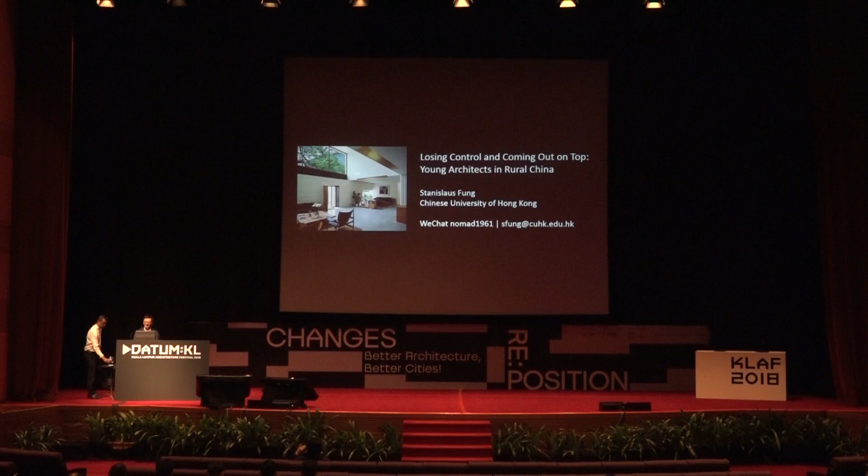The talk that I'm presenting to you is in 4 parts. And if we run out of time, I will have to rush the last part or omit it altogether. But let's hope the going will be good. Basically, I will give something of a quick overview of Chinese architects in the last 30 years, mainly because in the English language, a simple, useful account is not available.

And then in the second part, I'm talking specifically about gardens in Suzhou, especially about how to restore the visual experience of these gardens in a way that is useful for designers. And in the last 2 parts of the presentation, I'm speaking about small boutique hotels in 2 rural locations in China. One in southwest China, in Yunnan province, a place called Dali, where tourism has been doubling every 3 to 4 years. And also outside Shanghai in Moganshan, which is the only mountain area outside Shanghai accessible by car within 2 hours. So that's generally the outlook of the talk today.

I'm giving you on the screen some account of what the people who are currently practicing and aged 35 or thereabouts, people born in the 1980s, received from their seniors in the profession. The seniors, I mean people born in 1950s, 1960s, 1970s. Chinese education for architects since the 1980s, after the Cultural Revolution, was very much a local variant of the Beaux-Arts tradition that was imported by the University of Pennsylvania in the earlier part of the 20th century. They were interested in formal composition, basically.

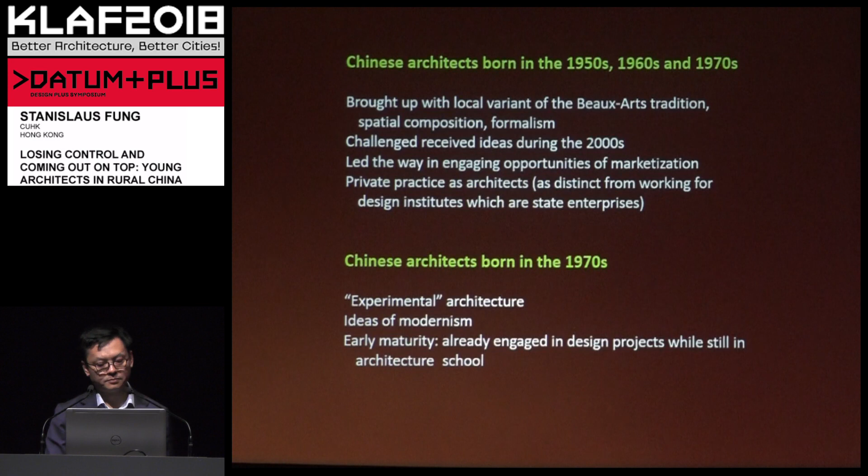People born in the 1970s had a lot of opportunity to practice. They were usually already engaged in design projects while they were still students. And so they were capable of an early maturity that probably wouldn't be seen in Australia or in Europe, where opportunities to practice wouldn't go to young people so quickly. For the people that I'm interested in today, those born in 1980s, they grew up with a discussion of tectonics. This was basically a reaction against poor quality construction. They weren't able to do German or Swiss quality construction, but people were talking about it as an aspiration.

The students born 1980s were in school maybe 13 years ago, and at the time people were discussing architectural space, spatial syntax, something like that. This generation of students was the first generation to grow up with the internet. The internet came to China around 1999-2000, around the time of the Sydney Olympics. This allowed them to gain access to a huge range of imagery that would otherwise not have been available to them in printed media. And for a while, the students outran the teachers and the publications sanctioned by the state.

They also had joint studios with foreign schools of architecture. In the last 18 years, more and more schools of architecture from overseas had joint studios with places like Beijing and Shanghai. This internationalization outran a lot of schools in Australia. Opportunities to study overseas became more generally available to people in this group born 1980s. Their family circumstances were better than those before them, and there was more cash to support them to go overseas. So this was similar to what happened in Hong Kong maybe during the 1970s.

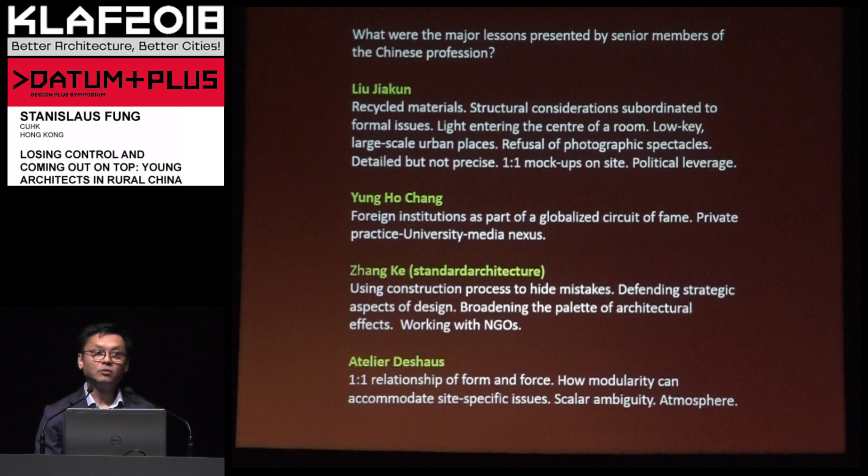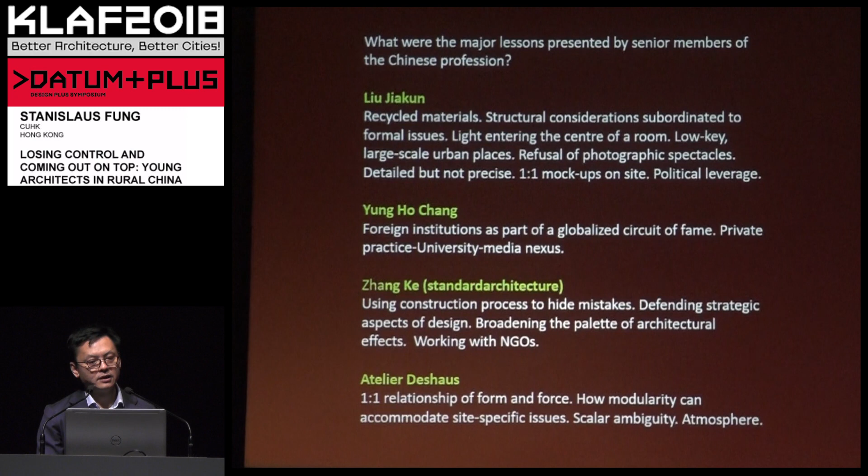So let me summarize very quickly for you what were the major design lessons presented by senior members of the Chinese profession. By this I mean senior members who were not working for the state enterprises called design institutes. Liu Jiakun from southwestern China in the province of Sichuan is very well known nowadays for discussing recycled materials. You remember some while ago there was a massive earthquake in southwestern China, so there was a lot of debris. And he developed interesting approaches to recycled materials in response to that.

He was somebody who did work that didn't pay attention to whether it would look good in photographic spectacles. Sometimes he would do details that, when you photograph them, wouldn't come off as highly detailed. He was not interested in doing work that competed with KPF in terms of the precision of detailing. He thought that was too technical. And there was a sense of detail in his work that didn't depend on geometric precision. Because he worked with a lot of unskilled laborers on sites, he did one-to-one mock-ups on site to control the quality and to look forward to what could be done with the skills available.

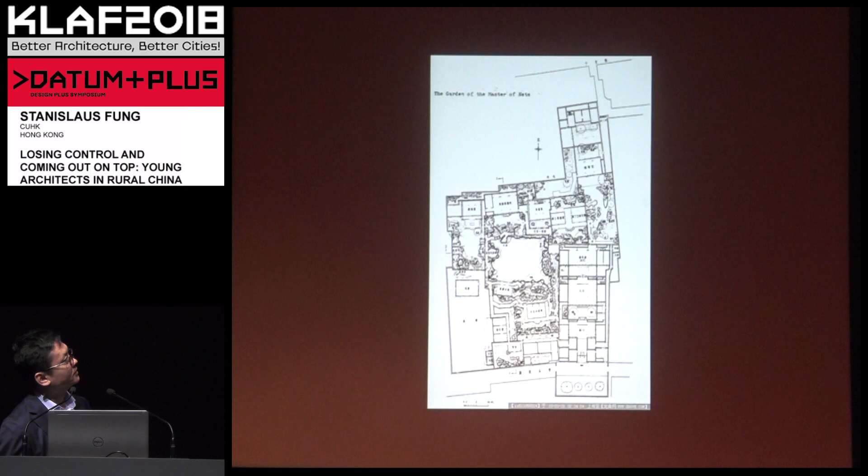And instead of allowing the pond to take the full width of the site, the division of the site actually goes north-south and makes two cuts. One cut here, one cut here. And so the pond, in terms of the width of the pond, is much smaller than otherwise we could have. So the whole issue then becomes how to make it not appear so small.

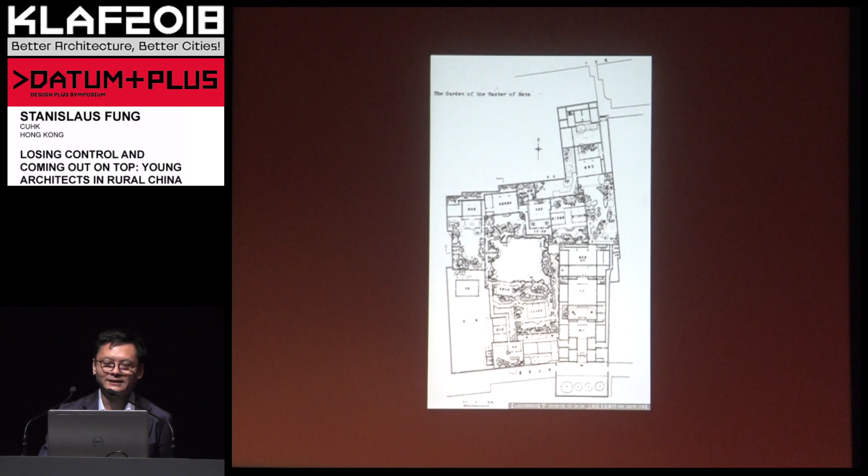On the southeastern side of the garden, there is a passageway leading to the pond. And as you walk closer to it, the pond seems to increase in depth. So you are getting closer to the pavilion on the opposite side, but as you move closer, it seems to be moving further away.

North of the pond, there is a room, and there are two doorways. The smaller doorway leads to the bigger space. The bigger doorway on the left leads to the smaller courtyard. In other words, the sizing of the wall opening confuses you in terms of your expectations. On the right-hand side, as you move towards the wall opening, for about 3 meters, there would be no reason for you to revise your estimation of how large that space beyond would be until you reach the opening and you realize that it's much bigger than you thought.

When we look from the north side of the pond towards the south side, a flower bed is strategically positioned to hide all the water of the pond. And as you expect from the previous discussion of the larger garden, whenever a ground surface or a water surface is hidden, there is a spatial collapse of distance. And so we experience the pavilion on the opposite side of the pond much closer to us than otherwise would be.

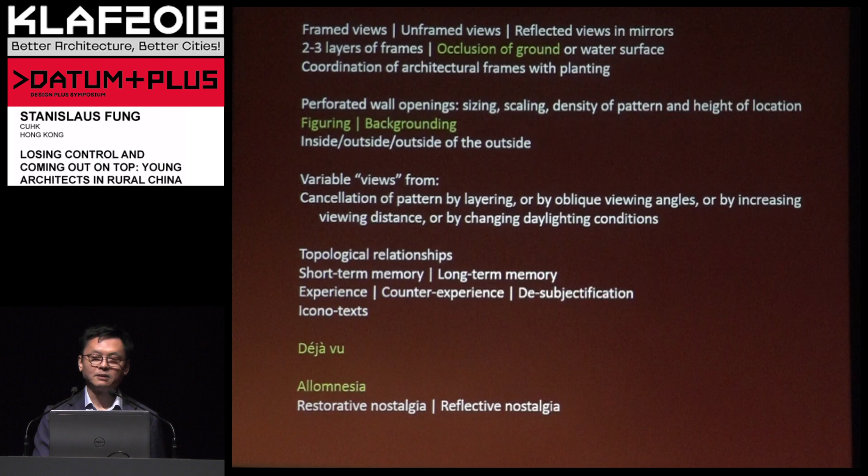So the third part, this is the hotel in Dali. Dali is not a famous city. It's in southwest China, not rich. In 1984 or 85, nobody knew about it as a tourist destination. That year, Lonely Planet published it and said it was an authentic part of China. Suddenly, 10,000 foreigners descended with foreign currencies, and they were totally unprepared.

After a while, the mainland Chinese themselves were rich enough to do internal tourism. They decided to go to Dali to look at foreigners because there were not so many foreigners in their own cities. The foreigners were not happy about that. So eventually, the local tourism became more directed towards internal tourism. And so nowadays, with the pollution in the bigger cities, people are very happy to leave Beijing and Shanghai and take their family for a week to Dali. You could rent a room for 300 yuan a night, and in this hotel that we want to do, the average floor area is 24 square meters per room, and we want to charge $200 and not make you feel bad.

At the street level, in the old city, there's a cafe from the hotel overlooking the street, and the level of the cafe is about 1 meter off the level of the street. As a result, walking by, you won't be able to see the floor surface of the cafe. And as you know from the Chinese gardens just now, whenever the floor surface is hidden, a space collapses. And so you can see this a little bit already in this view, because the floor surface there is hidden, and the distance of the wall of the room at the back of the courtyard is a bit ambiguous with everything else. There is actually a sill height here at the back of the cafe, and that assures that the ground surface of the courtyard behind would be hidden.

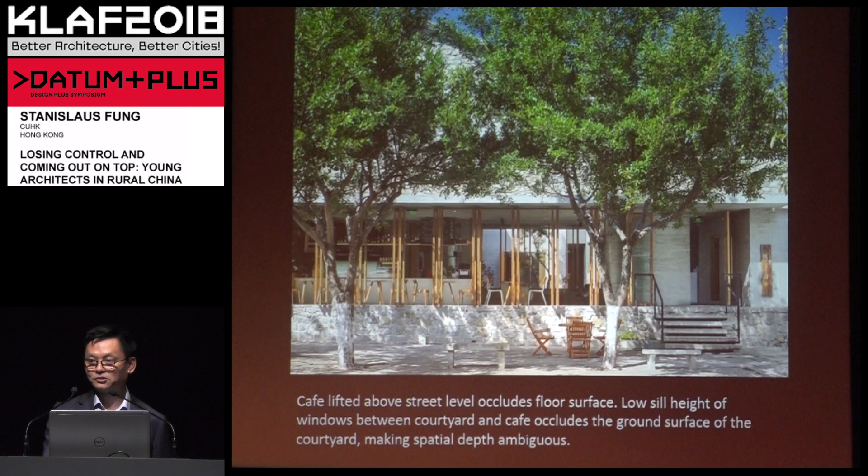At the scale of the rooms, though, 24 square meters is not large, and allows you, say, 13, 14 rooms on a rather limited plot, and they insist on sloped roofs in this part of the town for conservation issues. So you'll see that in a minute. The entry is on the right-hand side, and it's not a grand entry. It's off-axis twice, and is leading you in.

And this is the view of the courtyard looking towards the street, where we mentioned just now there's a window sill height here. So looking this way, because you're looking down on the street surface, you necessarily see the street surface, and so the distances are manipulated and different from what you had from the first view. So we're entering the courtyard in the middle, and there is a certain compression of height, and then you are in the courtyard. The courtyard is rather long, and is divided into three parts, simply because you have a tea room with glass on three sides in the middle part.

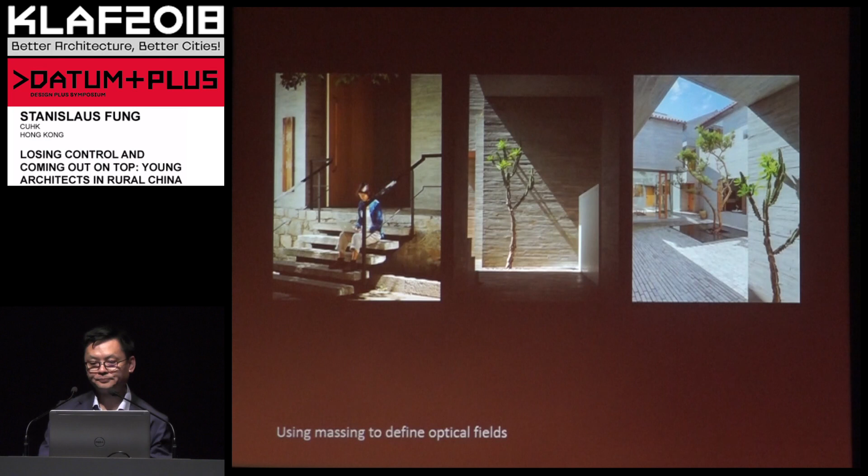So this is the main courtyard north of the cafe just now, and the tea room is on the left-hand side. In the notes, I'm saying the setback relationship of the walls created different aspects in the common courtyard area. And the scalar ambiguity is implied by the position and sizing of windows and doorways, and also by hiding the position of doors from certain vantage points.

You know there's upstairs, but in this view, you don't know quite how to get there. In other words, there's a disjunction between visual and tactile fields. In Chinese gardens, we often see pavilions in the distance where we don't see a path leading up to it, and this is exactly what is happening here.

You notice as well the thinness of the eaves overhang here. This is not a traditional way to do a roof with tiles. They have simply omitted one of those elements to make it thinner. It looks traditional, but actually it's not a traditional construction.

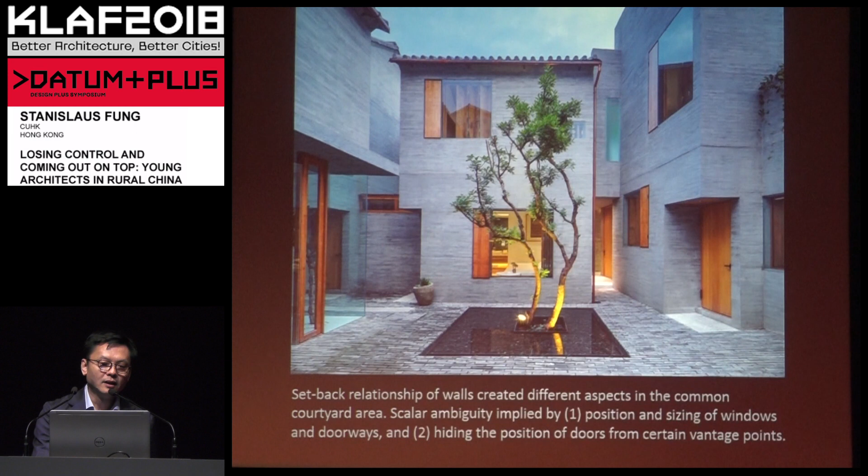The next view I'm offering you is about the suppression of the wall thickness. This is a way to avoid a scaled sense of the space, because wall thicknesses can be telling you a story about that. The window frames also have to be detailed to work with that. So whenever you want an effect, you probably are doing 3 or 4 things at the same time.

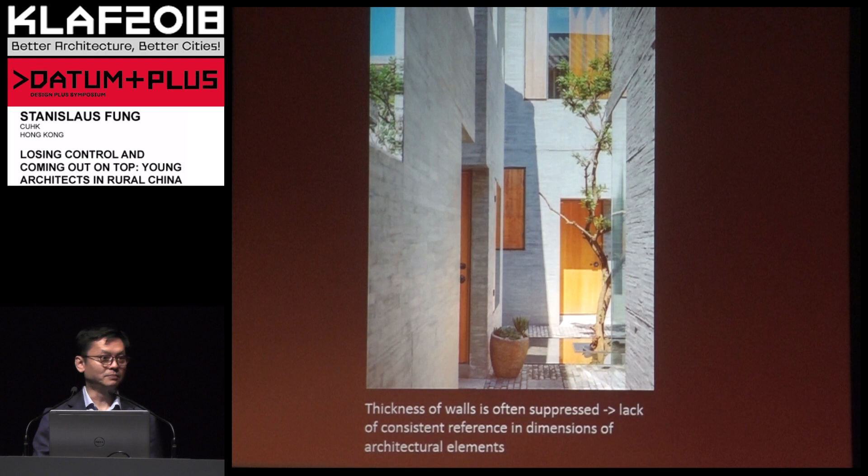You notice that there's no brickwork here. It's off-form concrete with strange thin strips of wood for the formwork, and so there's a scaling trick being used as well. So for every effect, 3 or 4 aspects of detailing are called upon to sustain it. We talk about it this way because we don't prefer to talk about things as single cause-effect relationships. I did this because of this. That's too simplistic and people work it out far too quickly.

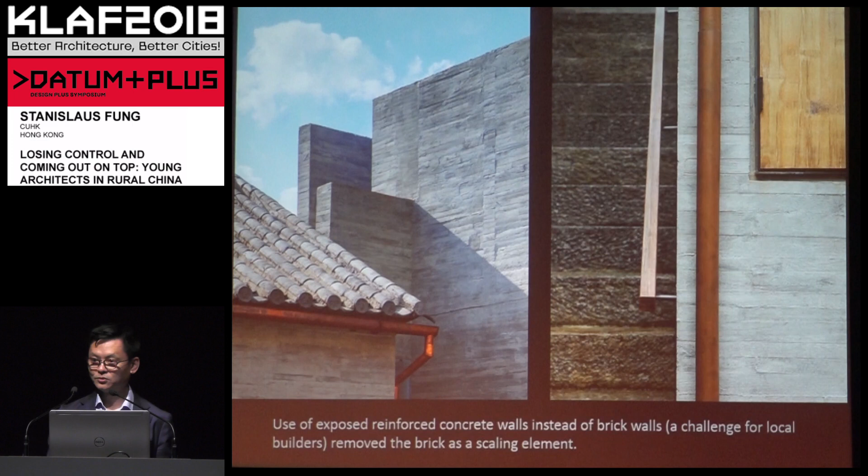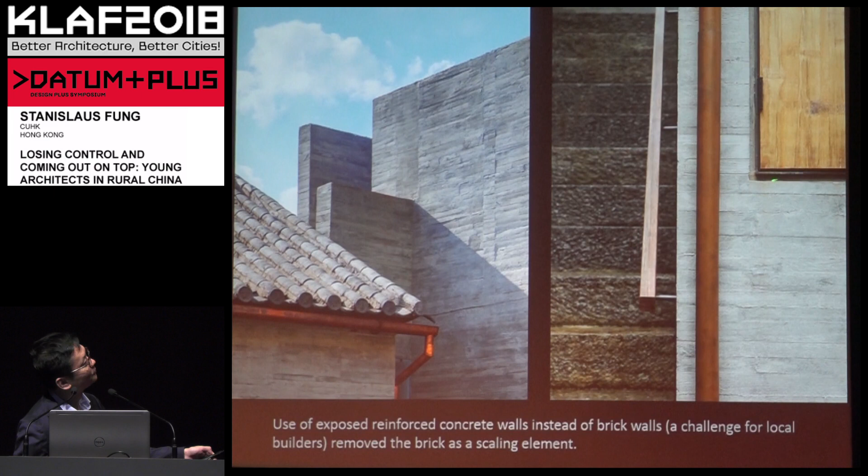So this is a close-up showing the off-form concrete, which is not so easy to do in rural China because you don't get the experienced work people to do it. And in this case, they had to bring people from Kunming, about 6 hours by train away, to come and do it. You notice the thicknesses here? They are coping and hinting at precision, but in fact not capable of delivering it.

So we have been developing, without telling you, a distinction between hi-fi vocabulary and lo-fi vocabulary. Hi-fi is high fidelity, lo-fi is low fidelity. And in rural China, we are mostly dealing with lo-fi architecture. And this distinction has been elaborated most recently by Jeremy Till, a professor in London. So far, our lo-fi vocabulary for thinking about boutique hotels is listed here for you. You're very welcome to take a photograph of the image instead of taking notes yourself.

But you see that this list of vocabulary is not what you normally have for discussing hotel design or architectural design. And they are tailor-made to point to the specificity of the images that we have been looking for. It's not that we use theoretical terms to sound intelligent, but rather we use the unusual vocabulary to call attention to the unusual effects that we are seeing in those images.

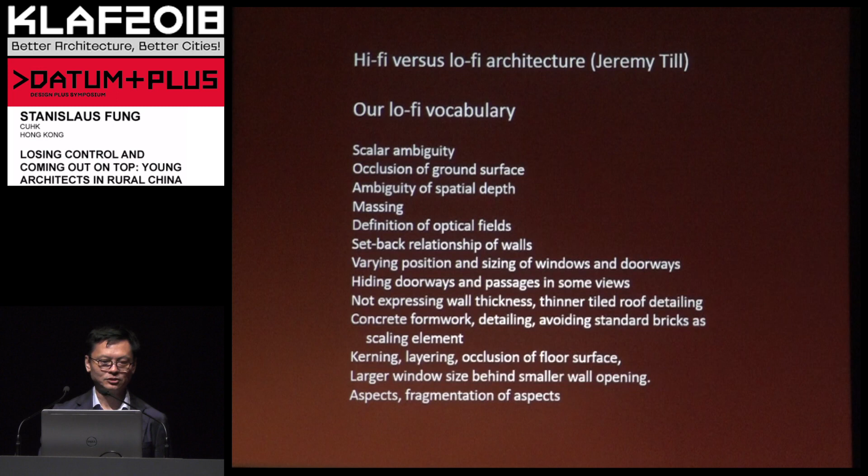Last part is about the Lost Villa. And this is a village where Chiang Kai-shek used to have a summer resort. So it's outside of Shanghai, 2 hours by drive. So in the village buildings, there are all sorts of ownership rights, and you really have to respond to them. For example, there is a vegetable patch here, and it's because the old lady who owned that plot didn't want to give up her business of growing vegetables. So you have to fit your hotel around what she wanted to do.

There are other neighbors who have other ideas as well that you have to work with. And these requirements or expectations might not be announced to you when you do your designing. When you have started building the project, they start announcing their objections and so on. So you are developing and changing, and eventually, if you don't do it properly, it will look terrible. There are no survey drawings in villages, so where the electricity cables are is a guesswork thing. You might find the cables 1 meter closer than where you thought they were, and you have to move a wall or something like that.

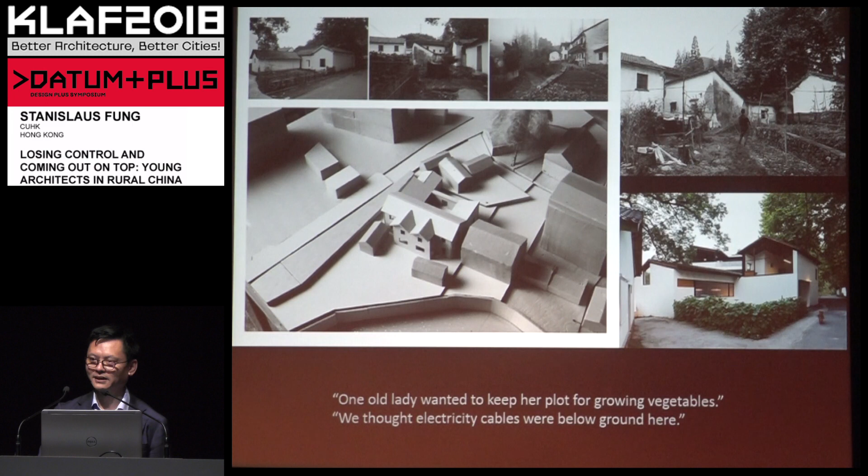So eventually, we developed an idea that there were constraints, and there were ad hoc responses to the constraints, and this led to 4 kinds of considerations, which I listed for you in English on the lower right of this image. So the design thinking is very specific, and we're not narrating it as if it was a generic design process.

Because we're interested that each site has its own contingencies, we started listing them by what the architect thought was predictable or unpredictable. Natural Build is a firm with 3 partners, and Shui Yanfei, the design partner, is trained in Tongji University and Princeton University. A young person who could read Dalibor Vesely, and actually was accompanying Dalibor Vesely to Suzhou about 10 years ago. So this is a guy who could actually read something and write something and do the jobs. So he's quite an unusual guy with a broad expertise.

So we thought that different contingencies would devolve into different aspects of the design. This diagram is a post facto review of how to use different aspects of design to respond to whichever contingency. Eventually, there is a topological diagram narrating different aspects of the design, and there's a sectional relationship between them as well. The local government thought that there were not enough restaurants to cope with tourists, and so they were interested in a publicly accessible restaurant. And of course, you have to separate the traffic.

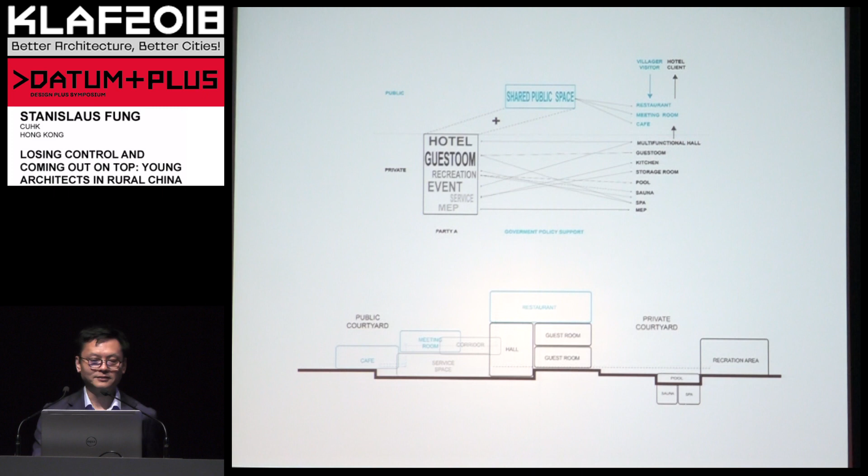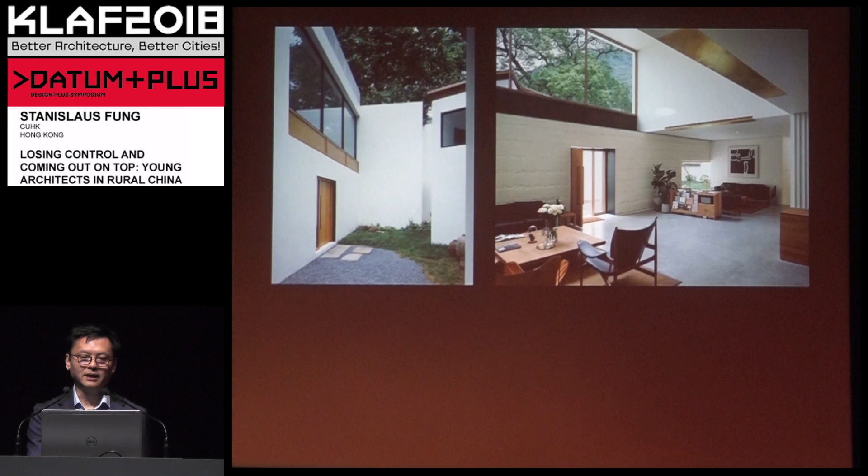So this is part of the result, and the lobby is this. And we're noticing how the openings are overscaled and underscaled. And from the outside, on the left-hand side, you wouldn't have imagined that the inside is that big. And this is the sort of effect that reminded us of the issues that we were discussing. There were structural things that couldn't be done very properly, and especially lines meeting at corners very precisely. And so those things were done actually with a different material, so you get that, and it's incorporating the air conditioning and so on.

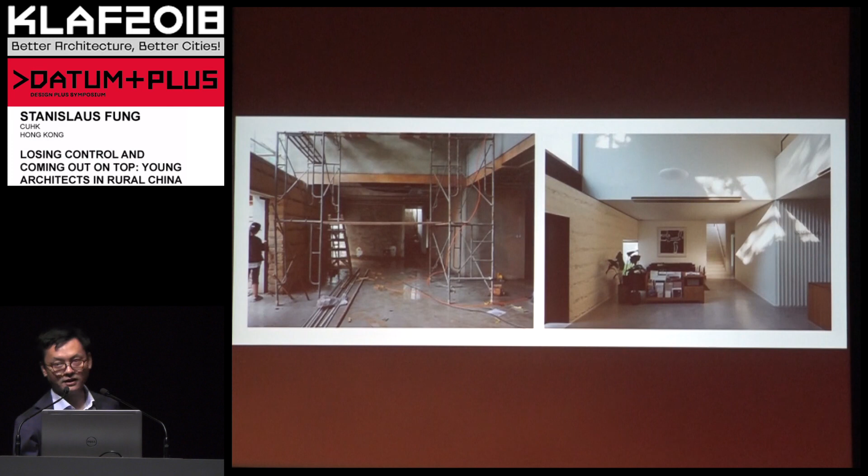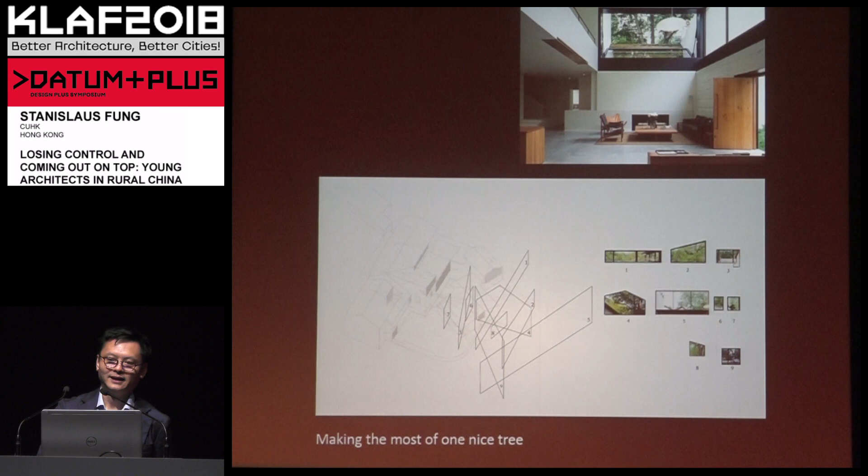There was a giant tree there, and there were 9 window frames taking advantage of the tree. And there were these wooden panels. It's a patented window frame, steel and wood together. But the wooden part of the panel allows you to hide the ground surface outside at some angles and can bring the scene much closer to you.

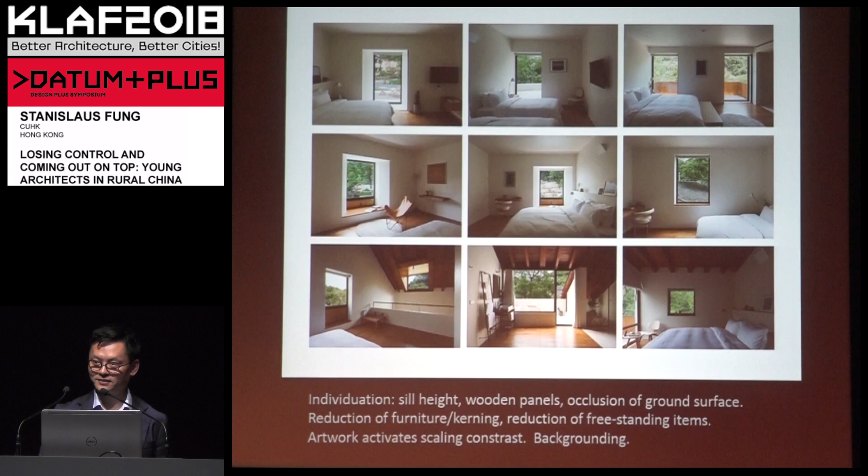In this image, I call your attention to the reduction of the number of chairs and other furnishings. And there's an attempt to background some of the furniture so that the room appears bigger than it really is. The sizing of those paintings is also calibrated with the other openings to give a range of scale so that you don't just feel that there's one scale and it's small. Frank Lloyd Wright has an idea that furniture in rooms can be considered with architectural elements as an organic unity, pretty much as a background for human activity, as much as things that you can look at for their own sake. And this seems to be relevant here.

David Leatherbarrow has an article called "What Fragments Are to Desire, Elements Are to Design." And here he's thinking that fragments stir your desire for things. So you frame things, you present things as fragments. So we started thinking about footprints of the existing buildings as a pretext of fragmentation and so on. If we had time, we would go into a distinction between redundant precision and apparent precision, which is very helpful for rural work when you couldn't have very, very absolute precision. Sergison, the Swiss architect, also has a recent article in a book called The Working Drawing, out of print now, where he called attention to the management of dimensional information in the drawings.

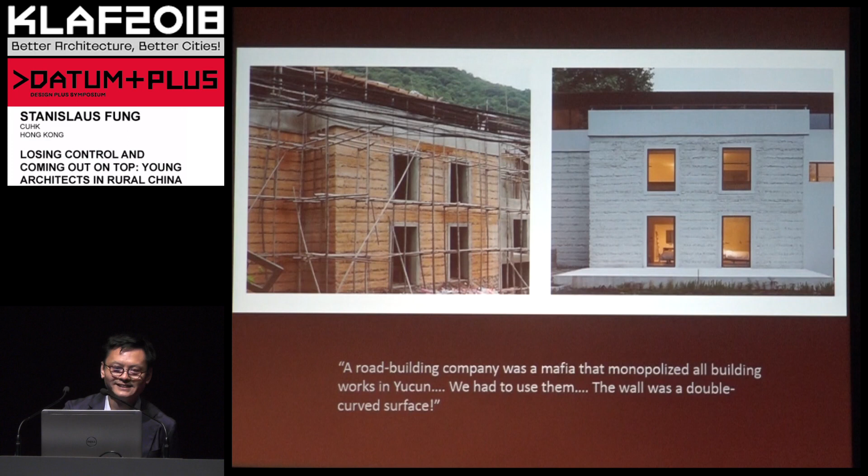So in practice, you have a road building company that was a mafia locally that monopolized all building works in that village. And the architect said we had to use them. When they built the wall, it was a double curved surface. And then you have to hide the problem. These are two related views showing a different sense of distance, which is what we had seen in the gardens.

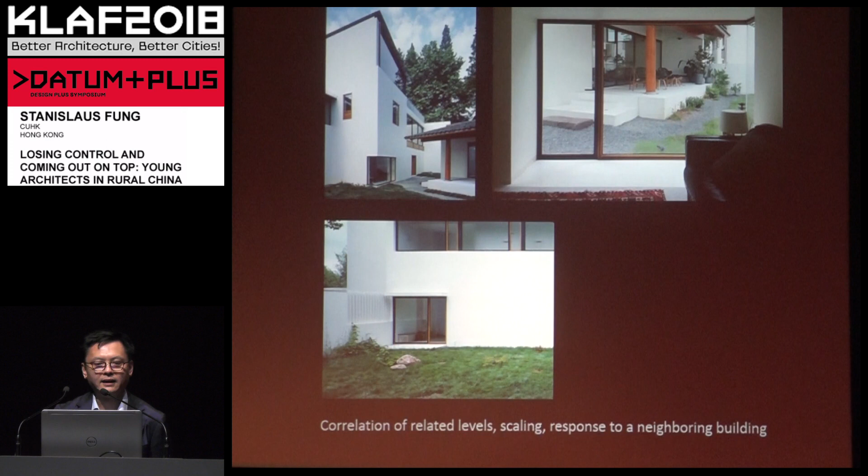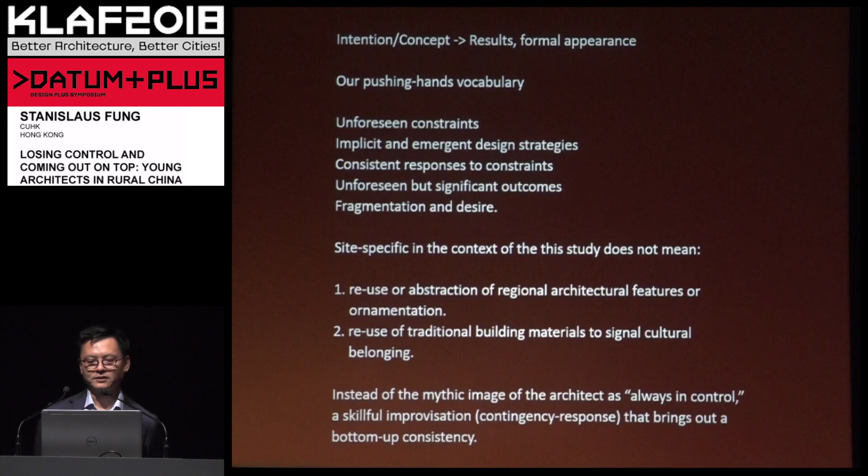So overall, we're not talking about intentions and concepts leading directly to results with a formal appearance. We have a pushing hands vocabulary, and it's listed there for you. The site-specific aspects of the study don't mean a reuse or abstraction of regional features or ornaments. It doesn't mean reuse of traditional building materials either. So it is a rather unusual idea that we are pushing in front of you, and I would welcome a discussion about that. Thank you very much.